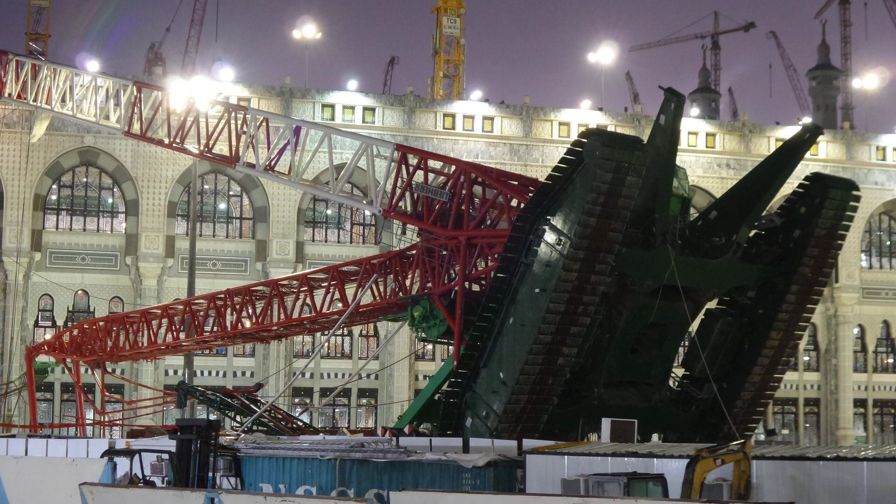September 11th, 2015. In the heart of Mecca, as pilgrims gathered for prayer beneath storm-darkened skies, a 1,350-ton crane, supposedly one of the world's safest, came crashing down with unimaginable force. Overnight, the holiest site in Islam became the stage for a catastrophe. 111 dead, nearly 400 injured, and a question that still haunts those who witnessed it.

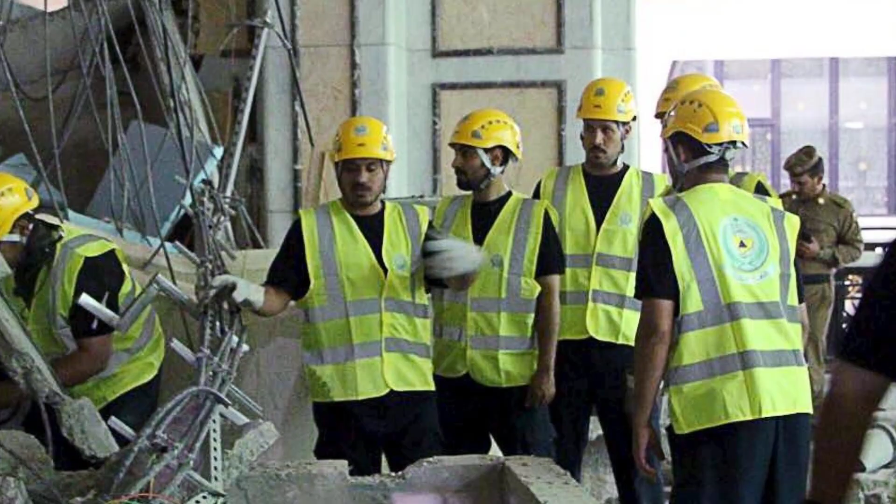How could the Mecca crane catastrophe happen in a place built for faith and safety? Was it an act of God, or a disaster hiding a fatal human error? The truth behind that single decision, and the chaos it unleashed, starts now.

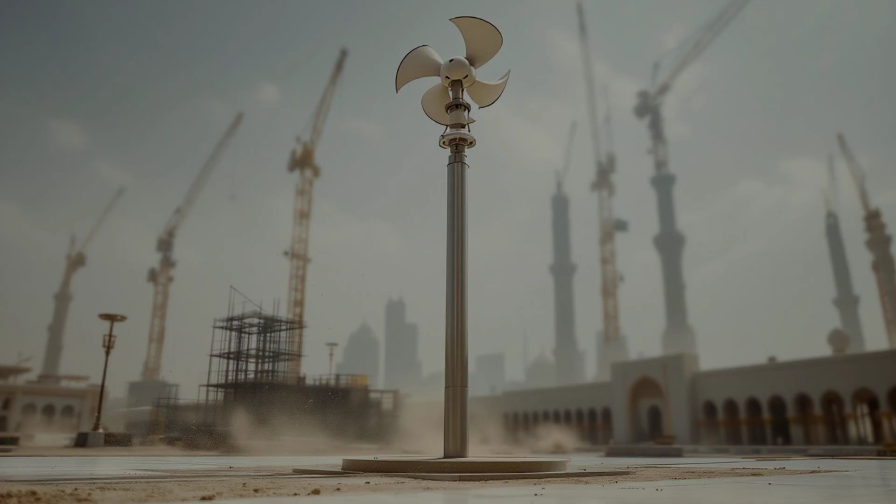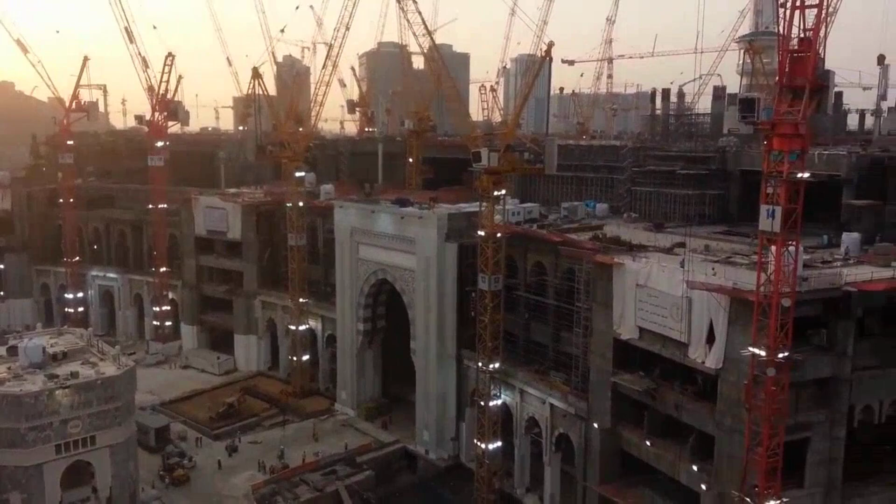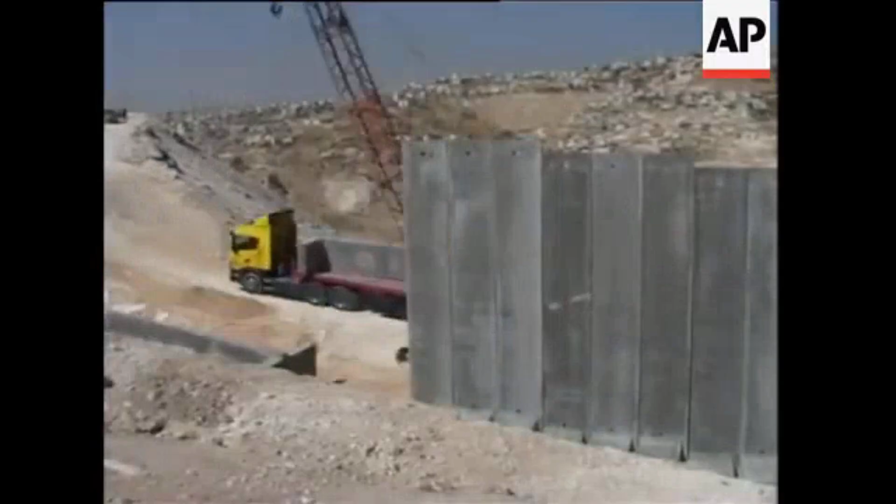Thunder rolled over Mecca as dusk approached, but it wasn't the rain that set danger in motion. Meteorological reports clocked wind gusts at nearly 25 miles per hour, strong enough to whip sand and debris across the marble courtyards. Above the sacred ground, the skyline bristled with cranes. The Grand Mosque had become the world's largest construction zone, a $26 billion expansion project, racing to accommodate 2 million pilgrims for the coming Hajj.

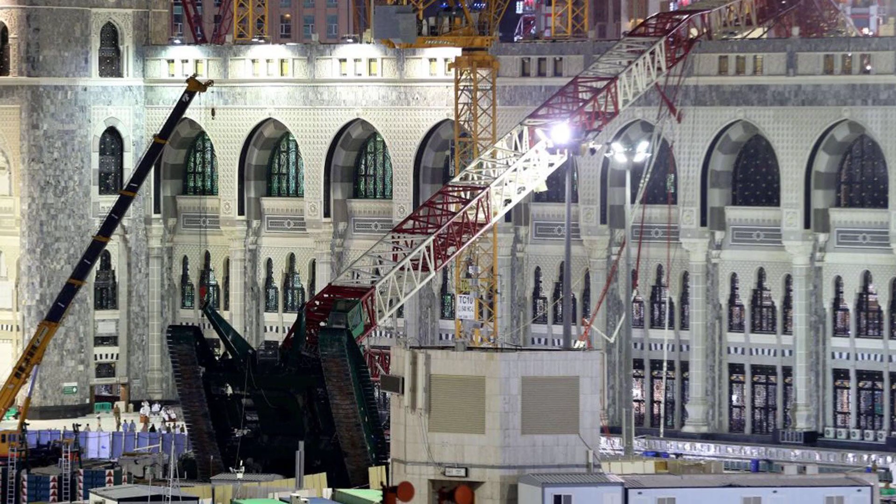Site schematics from 2015 showed dozens of cranes packed around the mosque's perimeter, their booms overlapping like the spars of a crowded harbor. The Liebherr LR 11350 stood among them, its main boom towering high, not lowered as safety guidelines would demand when storms threaten. The site's congestion left little margin for error. Operators navigated a maze of steel, each machine hemmed in by the next, with precious little space to maneuver or secure equipment quickly.

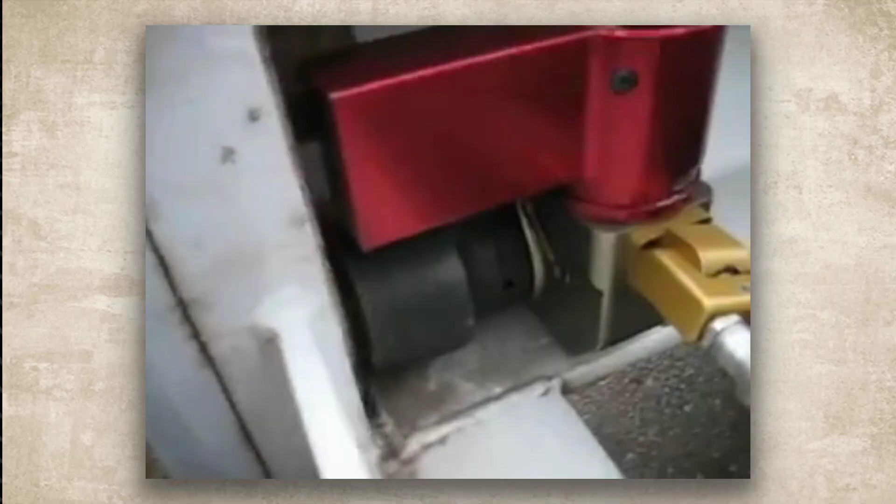Eyewitnesses described the sky turning yellow-gray as the sandstorm intensified. Sheets of dust swept through the colonnades, reducing visibility and coating machinery in grit. The wind pressed laterally against every exposed structure. For a crane with its boom raised, each gust delivered a force measured in tons. The LR 11350, designed to lift the weight of 7 blue whales, now faced a different test, resisting the sideways shove of the storm.

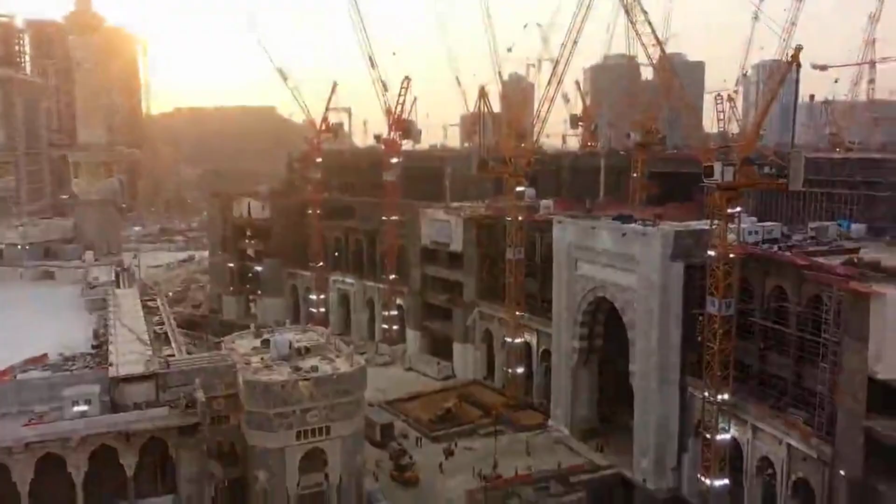Construction managers had been warned that crowded sites amplify risk. Multiple cranes in close proximity can block safe stowage, complicate emergency procedures, and obscure lines of responsibility. On that Friday, the perimeter of the Grand Mosque was a forest of steel, each crane a potential hazard if the weather turned. As the wind built, the stage was set. The external pressures, natural and man-made, were converging, priming the site for disaster.

At 5:10 p.m., a sound like tearing metal cut through the air above the Grand Mosque. The Liebherr LR 11350, its boom still raised against the storm, began to tip. CCTV footage later confirmed the sequence. The crane's massive arm wavered, then lurched, as the wind forced its center of gravity past the point of no return. Steel cables snapped, echoing like gunshots across the marble. In seconds, the boom and counterweights, together weighing hundreds of tons, plunged downward.

The impact shattered the mosque's roof, sending slabs of marble and twisted rebar crashing into the prayer corridor below. Worshippers who had knelt in silence were thrown into chaos. Survivors recall a deafening roar, followed by darkness and dust. One pilgrim described hearing thunder, then feeling the floor tremble before the ceiling collapsed. Another said, "It sounded like the end of the world."

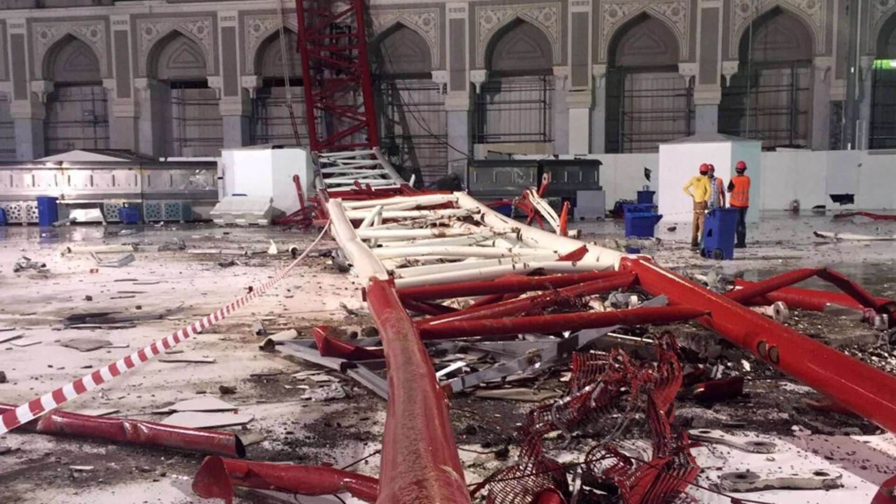Debris rained down across a wide swath of the courtyard. The crane's boom sliced through ornate columns and scattered prayer rugs, scattering shoes and personal belongings across blood-stained marble. Many victims were struck mid-prayer, unable to react in time. The force of the collapse left bodies pinned beneath steel, while others struggled to breathe amid choking dust and the crush of panicked crowds. In the confusion, cries for help mixed with the blare of alarms.

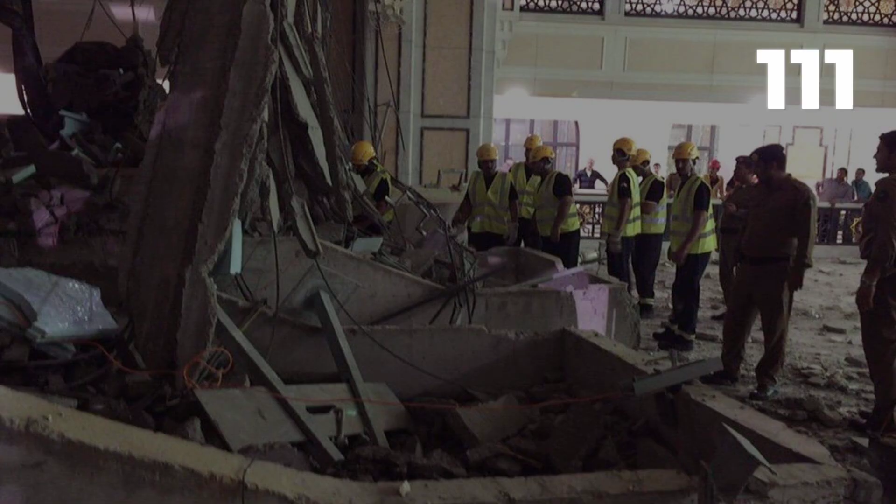First responders rushed in, weaving between fallen beams and dazed survivors. The mosque, meant to be a sanctuary, had become a scene of devastation. Within moments, 111 lives were lost, and nearly 400 more were injured. For those inside, the boundary between sacred space and disaster had vanished in an instant.

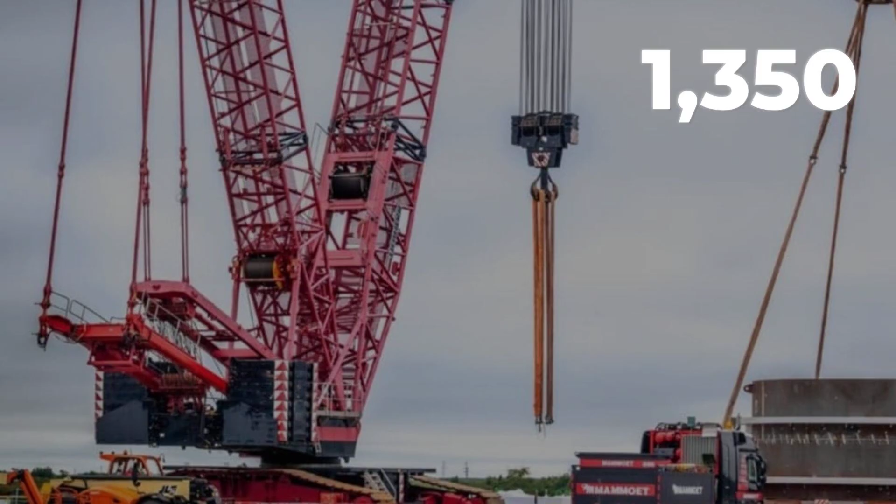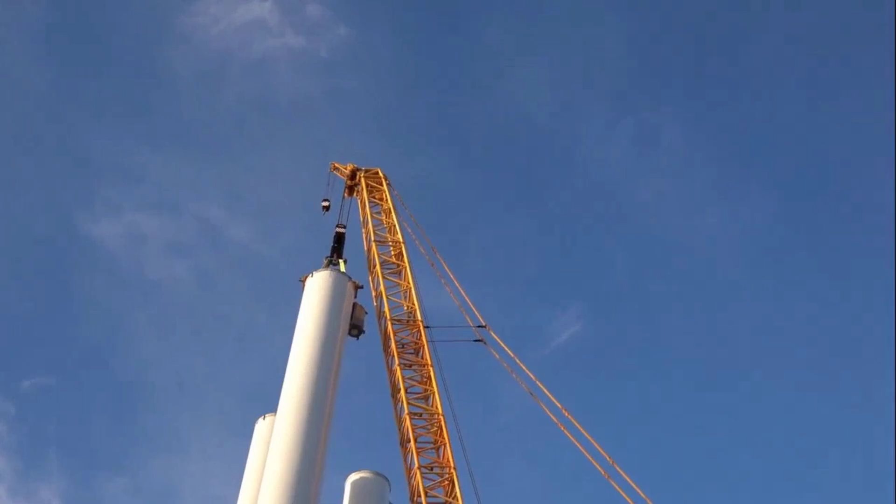The Liebherr LR 11350 is not just a piece of heavy machinery. In the world of construction, it stands as a symbol of precision and power. A crawler crane engineered to lift 1,350 metric tons, or roughly the weight of 7 blue whales. Its main boom, when fully extended, reaches over 220 meters into the sky, rivaling the height of some of the world's tallest landmarks. The base rides on massive, tracked crawlers, distributing the crane's weight across a wide footprint to prevent sinking or tipping, even on soft ground.

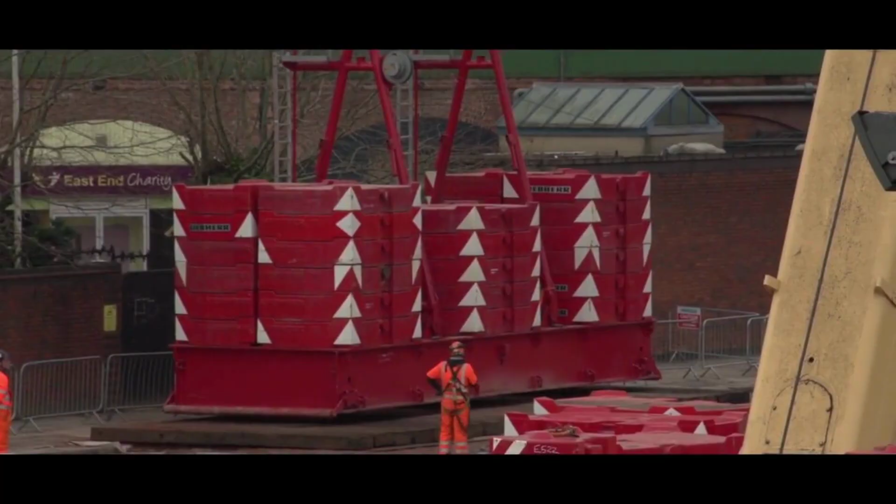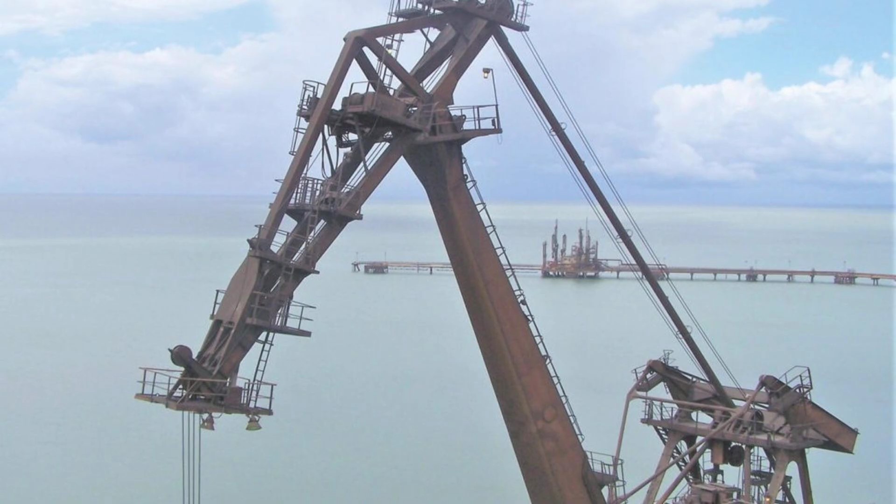Central to its stability is a carefully balanced system of counterweights. These are not mere ballast. Each block is calculated to offset the enormous forces generated when the boom swings or lifts. The crane's design relies on a principle as old as the lever. Every load, every movement, must be counteracted by equal and opposite force. The LR 11350's engineers built in generous safety margins, anticipating the unpredictable: gusts of wind, shifting ground, sudden stops.

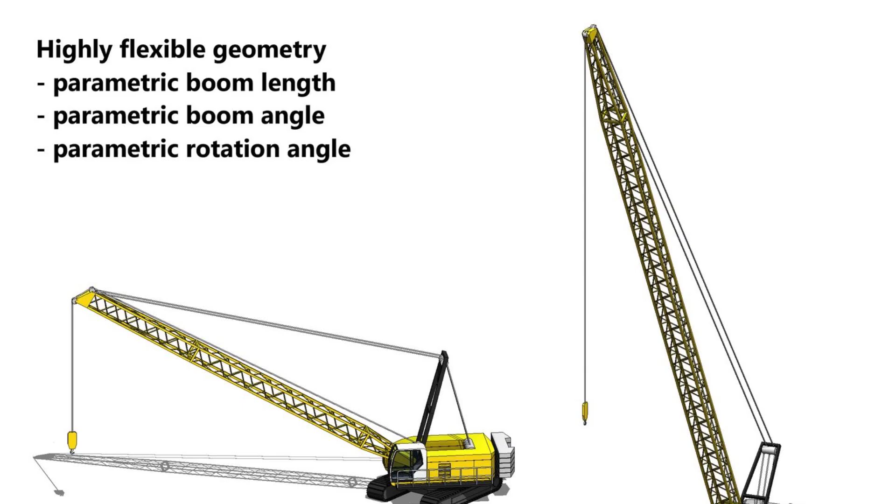But the real key to safety lies in the geometry of the boom. When lowered, the boom presents a narrow profile to the wind, allowing air to flow past with minimal resistance. Raised, it becomes a vertical wall, catching every gust like a sail.

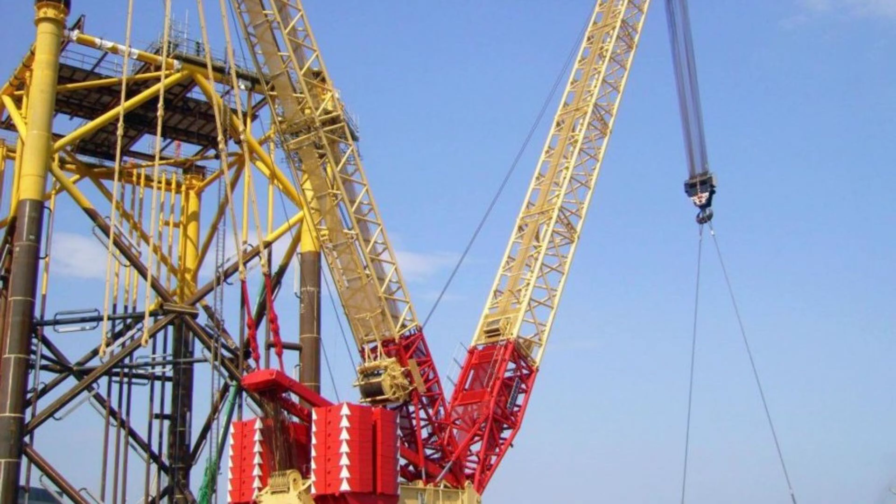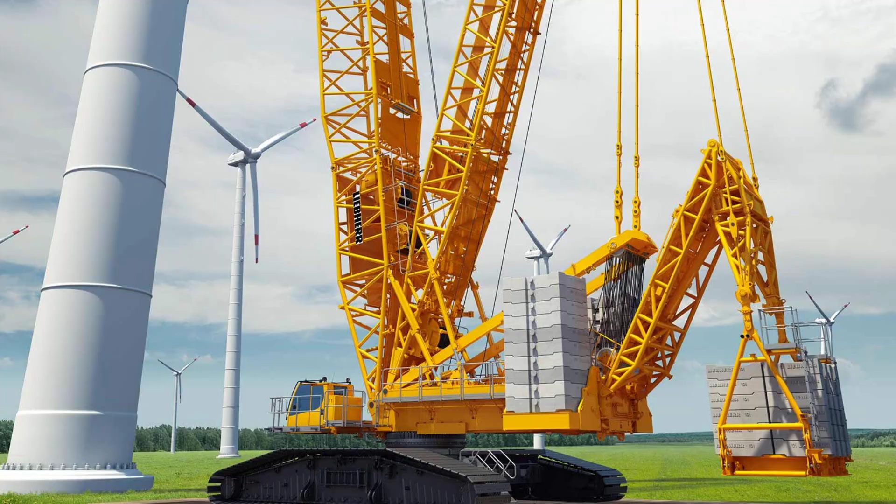Manufacturer manuals are explicit. In high winds, the boom must be brought down to the ground. This is not a suggestion. It's a line drawn by physics. The slewing ring, a massive bearing at the crane's base, allows the superstructure to rotate. It's engineered to handle enormous vertical loads, but lateral forces, especially those from wind, can push it beyond its limits if the boom is not secured.

On paper, the LR-11-350 should be nearly impossible to topple when operated within its design envelope. Every component, from the steel lattice of the boom to the hydraulics controlling its movement, is rated for far greater stresses than normal operation would ever demand. Yet all of this engineering depends on one thing: adherence to procedure.

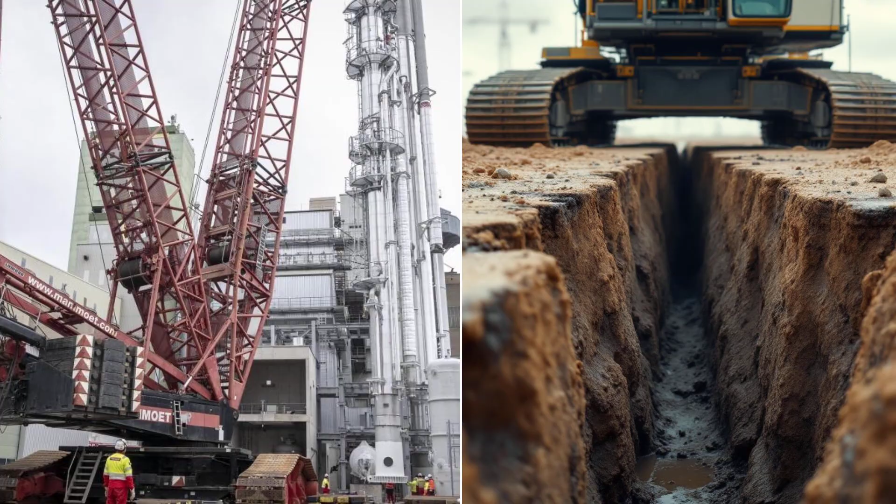The physics of the machine are unyielding. Ignore the rules, and even the most advanced crane becomes vulnerable. The next moments would reveal what happens when those margins are erased. The collapse of the LR-11-350 was not a mystery of steel or wind, but a failure of judgment on the ground. The crane's boom, left raised in defiance of manufacturer warnings, became a vertical sail.

Each gust delivered a force that multiplied with the height and length of the boom, testing the limits of even the most robust engineering. Site supervisors faced a hard truth: the crane's design could absorb only so much before physics took over. But warnings had been issued.

Saudi regulators, weeks before the disaster, documented risks tied to unsecured cranes and urged contractors to implement stricter wind safety protocols. Yet, on that Friday, no formal order was recorded to lower the LR-11-350's boom. Operators found themselves boxed in by a thicket of machinery. The site's dense layout made it nearly impossible to lower the boom without shifting other cranes first. A logistical nightmare, with the Hajj deadline looming.

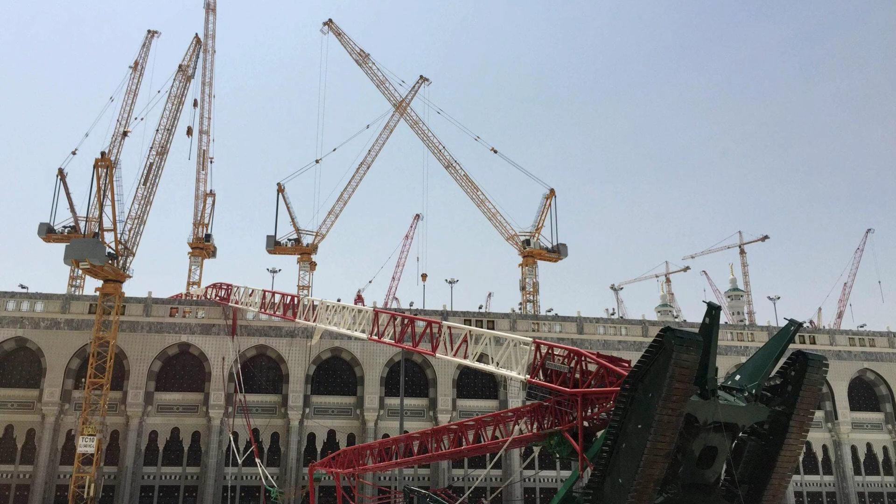Some accounts suggest that pressure to keep the project moving discouraged any pause for safety. In the hours before the storm, weather advisories called for caution, but site management failed to coordinate a shutdown. The boom remained upright, presenting the worst possible profile to the wind. Ground conditions added to the risk.

Soil stability reports from the site noted patches of soft, waterlogged sand beneath the crawler tracks. While not the root cause, this uneven footing reduced the margin for error. As the wind pressed laterally, the crane's center of gravity inched toward disaster. The slewing ring, designed for vertical loads, became the weak point under this sideways assault.

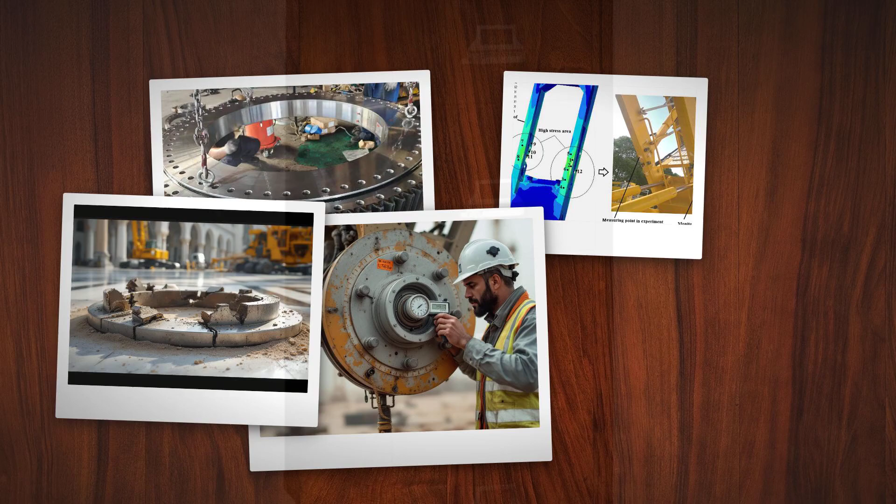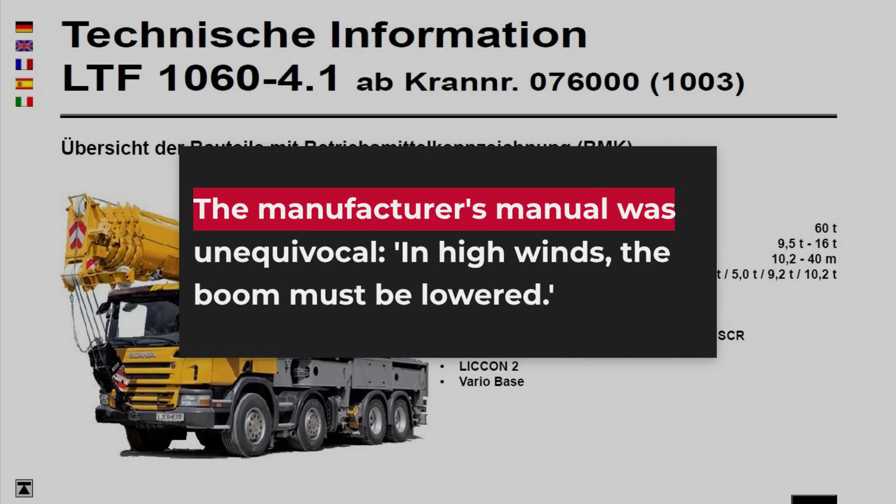Internal safety memos and inspection records remain sealed from public view, but the pattern is clear. The manufacturer's manual left no room for interpretation. In high winds, the boom must be lowered. The absence of action was not an oversight. It was a fatal lapse.

Saudi courts would later attribute the catastrophe to human error and ignored protocols, not a defect of the machine. The LR-11-350's collapse was preventable. It happened because the chain of responsibility broke, and a line was crossed from risk to recklessness.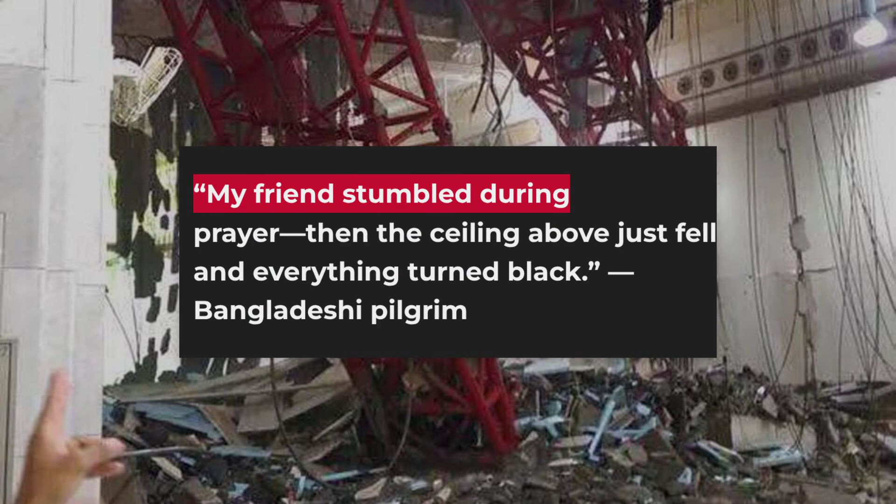The moment the crane struck, the Grand Mosque was transformed from a sanctuary into a disaster zone. Hundreds of worshippers, many in the final moments of Friday prayer, were caught beneath falling stone, steel, and shattered glass. Survivors describe confusion and terror as the lights flickered and the air filled with dust. A Bangladeshi pilgrim recalled, "My friend stumbled during prayer. Then the ceiling above just fell, and everything turned black."

First responders moved in quickly, guided by shouts and the glow of emergency lights. Medics and civil defense crews picked their way through debris, lifting twisted beams and broken marble with bare hands. The sacred floor, usually swept clean for prayer, was now slick with water, blood, and scattered shoes. Some rescuers worked barefoot, unwilling to desecrate the site, while others used microphones and cameras to search for signs of life beneath the rubble.

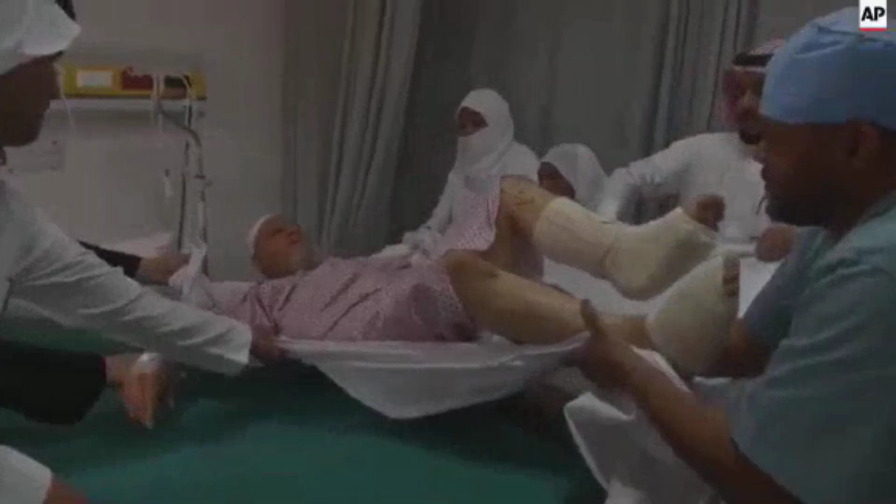The injured came from across the Muslim world: Indonesia, Pakistan, Egypt, India, Iran, and more. Many had saved for years to make this pilgrimage, only to find themselves searching for loved ones in the chaos. Hospitals in Mecca and Jeddah overflowed within hours. Families gathered in waiting rooms, clutching lists of the missing, hoping for news.

For some, the search ended in tearful reunions. For others, it meant identifying bodies in crowded morgues. The toll was immediate and staggering: 111 dead, 394 wounded. Some survivors would spend weeks in intensive care, facing amputations or permanent disability. The trauma extended far beyond physical wounds. For many, the memory of that day, of prayers interrupted by disaster, of strangers becoming rescuers, would never fade.

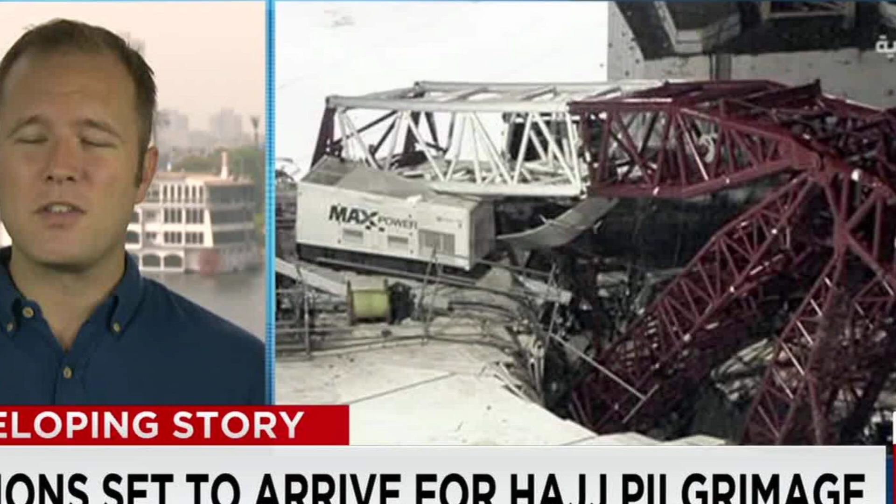In the days ahead, the world would search for answers, but in those first hours, the only certainty was loss. King Salman's decree came swiftly. Within hours of the collapse, the Saudi bin Laden Group, the kingdom's largest construction conglomerate, was suspended from all new public contracts. Senior executives found their travel privileges revoked, passports seized at airports and border checkpoints.

A special investigative committee, drawing from the Ministry of Interior and the Grand Mosque's own administration, began collecting evidence and interviewing site supervisors. By the following summer, the case reached criminal court. 14 defendants, engineers, site managers, and safety officers stood accused of negligence and failing to follow mandatory safety protocols.

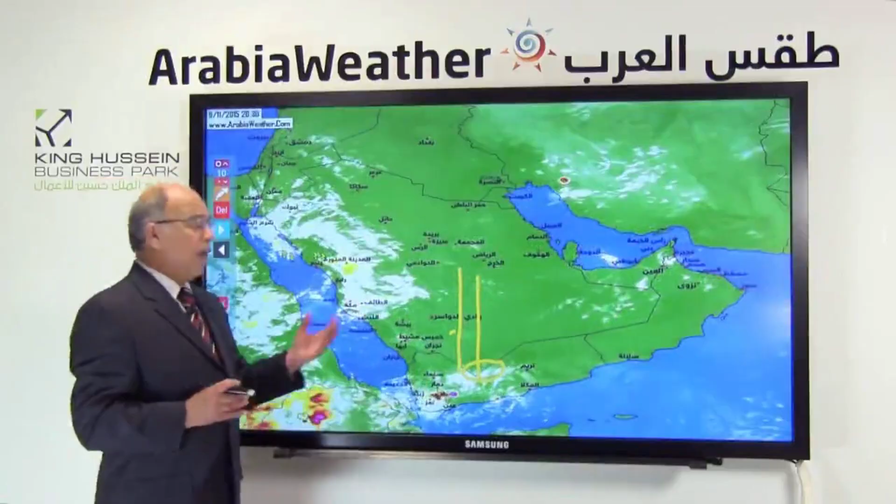The prosecution's argument was blunt. Manufacturer manuals and regulatory guidelines were clear, yet the LR 11350's boom was left raised during high winds. Court filings cited the absence of a formal order to stow the crane, despite weather advisories and previous warnings from labor authorities. The trial unfolded behind closed doors.

While the public clamored for transparency, official statements filtered out in fragments. No member of the bin Laden family itself faced indictment. Of the 14 charged, most were middle managers or technical staff. The verdict: a collective fine of 20 million rials, about $5.3 million US, and brief jail terms for a handful of individuals. Several non-citizen employees were deported after serving their sentences.

Appeals followed, and some sentences were reduced or suspended altogether on grounds of insufficient criminal intent. For many, the outcome stung. Survivors and families of victims voiced anger at what they saw as lenient punishment, especially given the scale of loss. Editorials and papers from Cairo to Jakarta questioned whether justice had been served, or whether powerful interests had shielded themselves behind layers of bureaucracy.

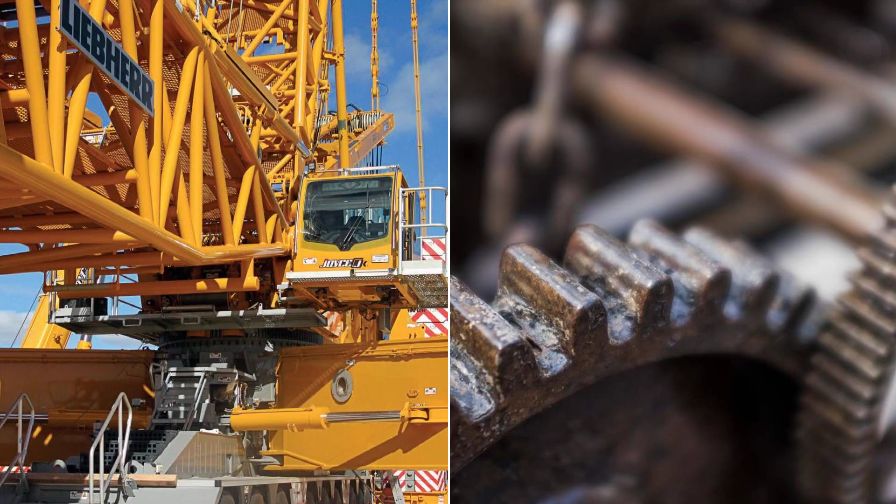The bin Laden Group weathered the storm, resuming government work within 2 years. The fines, while large on paper, were a fraction of the company's annual revenue. In the end, the machinery of accountability ground to a halt, not with sweeping reform, but with a handful of fines, a few short sentences, and a city forever changed.

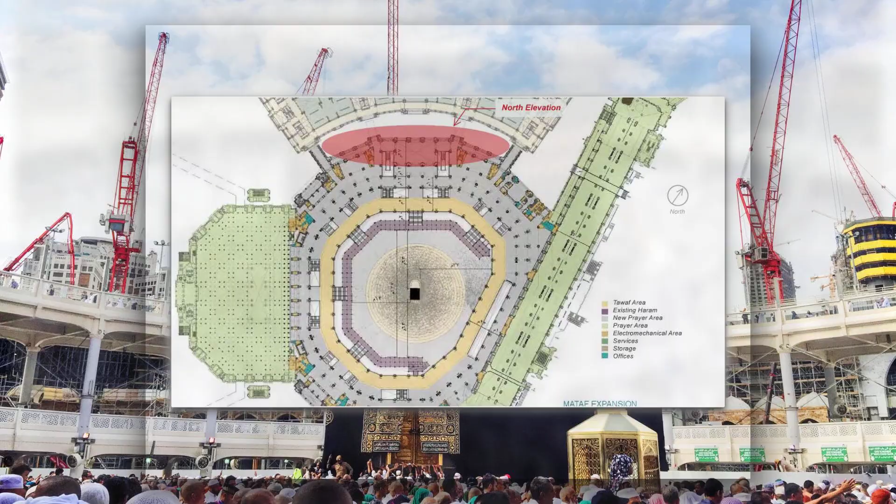The Grand Mosque expansion was the largest construction project in Saudi history, a $26 billion commitment to future-proof the heart of Islam. Project planners faced an unforgiving timetable. Millions of pilgrims would soon arrive for Hajj, and every delay carried the risk of overcrowded courtyards and global scrutiny. In 2015, the skyline around the Kaaba bristled with cranes, each one a marker of urgency and ambition.

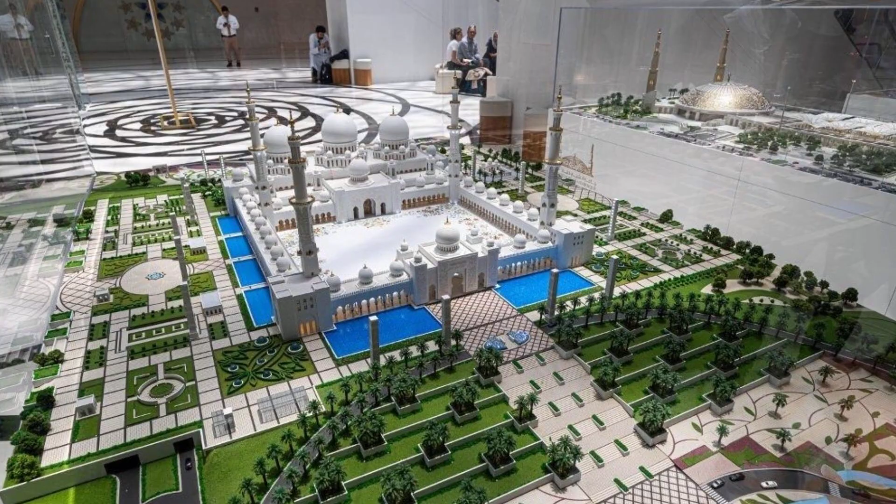Planning officials debated how to balance rapid progress against the realities of site safety. Some argued that meeting strict deadlines justified round-the-clock work, even as the site grew more congested and difficult to manage. Budget overruns and contractual penalties loomed over every decision. In the rush to expand capacity for 2 million worshippers, the culture on site began to favor speed over caution, a calculation that redefined acceptable risk and left little room for error.

Across the globe, the story repeats. Milwaukee, 1999. The crane called Big Blue was tasked with lifting a 450-ton roof section in winds gusting over 20 miles per hour. Engineers underestimated the force at elevation. The crane's boom, acting as a sail, toppled. 3 ironworkers lost their lives.

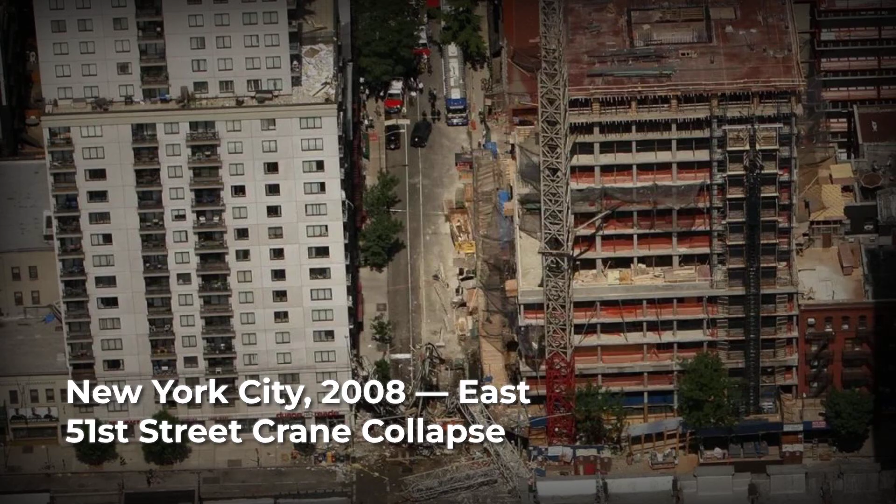New York City, 2008. A tower crane on East 51st Street collapsed during a rigging operation. The crew used a synthetic sling not rated for the load. The stabilizing collar failed, sending the crane crashing through buildings. 7 people were killed, including a pedestrian walking to work.

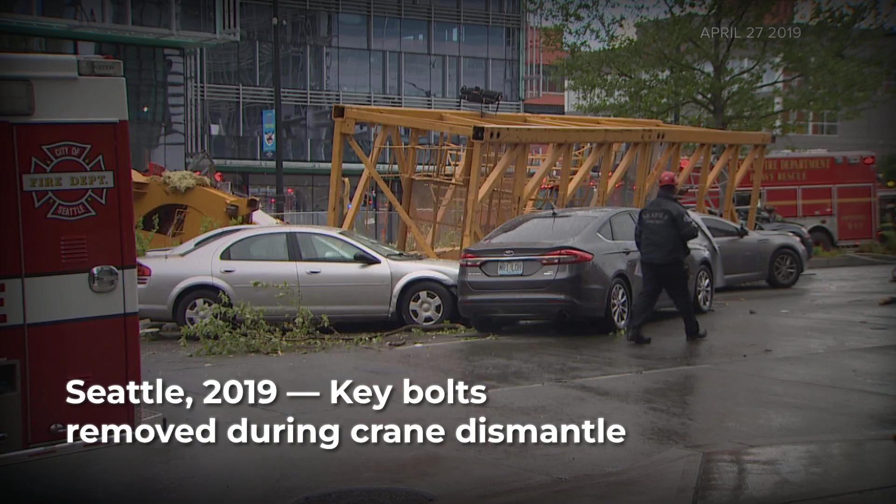Seattle, 2019. Contractors dismantling a tower crane removed key bolts too soon, violating manufacturer instructions. The mast buckled, falling onto a busy street below. 2 ironworkers and 2 people in passing cars died. Each disaster traced back to the same root. Warnings ignored, procedures bypassed, safety sacrificed for speed or convenience. The pattern is not unique to Mecca. It is a global problem, paid for in human lives.

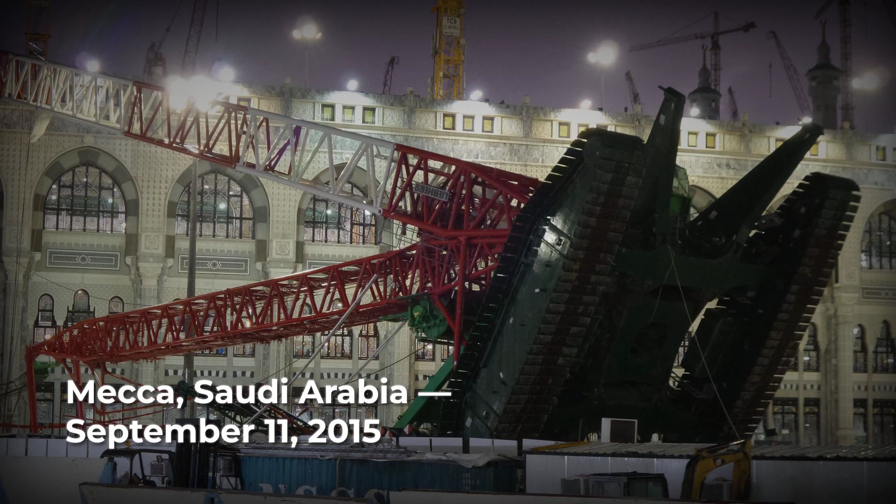On September 11, 2015, a 1,350-ton Liebherr crane collapsed at the Grand Mosque in Mecca, killing 111 people and injuring 394 more. The official investigation found that high winds and an unsecured raised boom were the direct causes, but also cited ignored safety protocols and prior warnings about site conditions.

Despite charges against 14 individuals and a $5.3 million fine, questions remain about the transparency of the inquiry and whether all responsible parties faced consequences. Some regulatory documents have never been made public. The Mecca disaster is not isolated. Similar collapses in Milwaukee, New York, and Seattle all point to a global pattern of preventable errors.

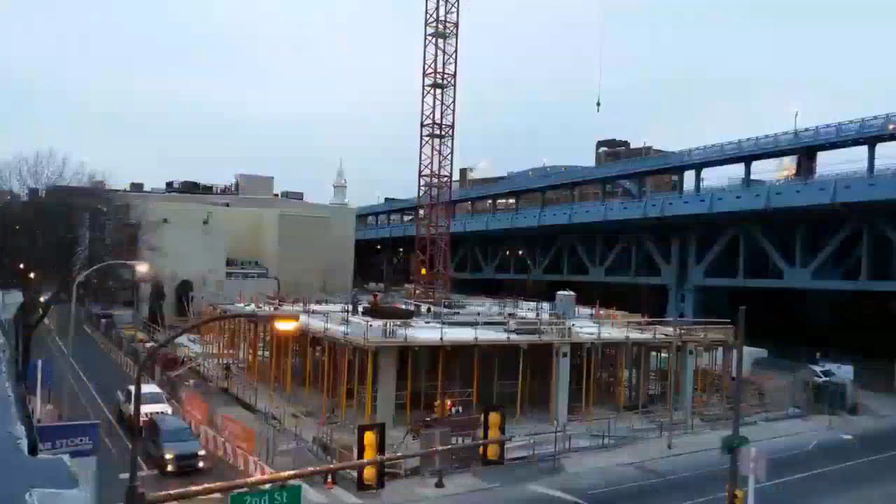Today, massive construction projects continue to push deadlines, often at the expense of basic safety. The record is clear. This was not an act of God, but a failure of human oversight. Every life lost that day was the price of avoidable neglect, and a warning that safety, not speed, must guide every decision where lives are at stake.